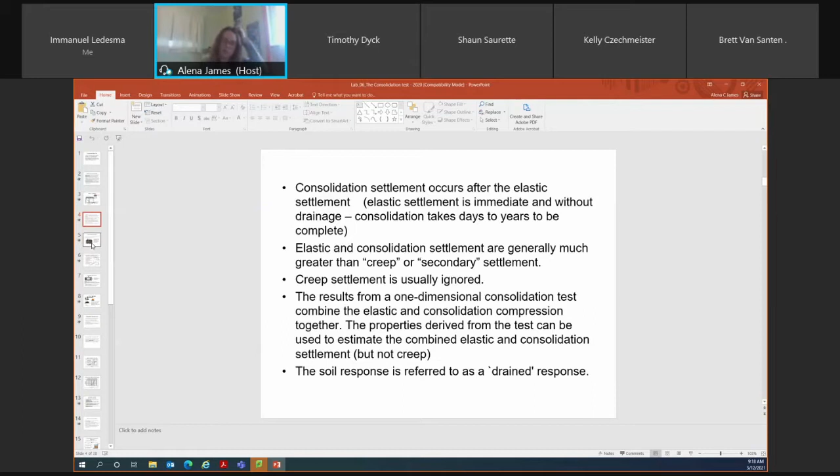Yeah, Ken's retiring. They are looking for someone to teach terrain analysis. They wanted to know if I wanted to teach that. So I made a condensed slideshow and I can upload it onto Learn for you guys if you like.

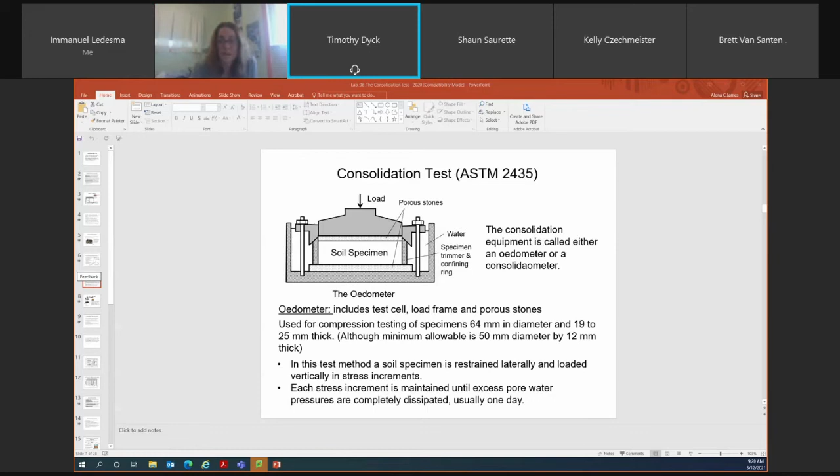He's probably presenting at Niagara Falls, Pavel, because he writes or co-authors quite a few papers, and he'd also be presenting on the Foundation Engineering Manual as well. He's a super nice guy, I really like him.

So I don't know who's going to be teaching terrain analysis.

Okay, so now we're going to talk about consolidation testing. The first six slides are basically words describing what I visually showed you, so you guys can take a look through those slides on your own, and if you have any questions, don't hesitate to approach me.

So now we're going to talk about consolidation testing. Obviously, we can't determine the magnitude or rate at which consolidation would occur without conducting a consolidation test. So this schematic shows you the apparatus that we use to conduct the consolidation test.

You put an undisturbed or relatively undisturbed sample from a Shelby tube into a piece of apparatus called an oedometer. Some people call it a consolidometer, I refer to it as an oedometer. Your soil specimen in that oedometer has a porous stone above and below it, so water can drain both upwards and downwards.

So when your specimen's in the consolidometer, it's restrained laterally and loaded on top vertically in different stress increments. So you apply a 1 kg load, the next day you'd apply 2 kg, so it's cumulative - 1 kg, 2 kg, 4 kg would be your total loads applied.

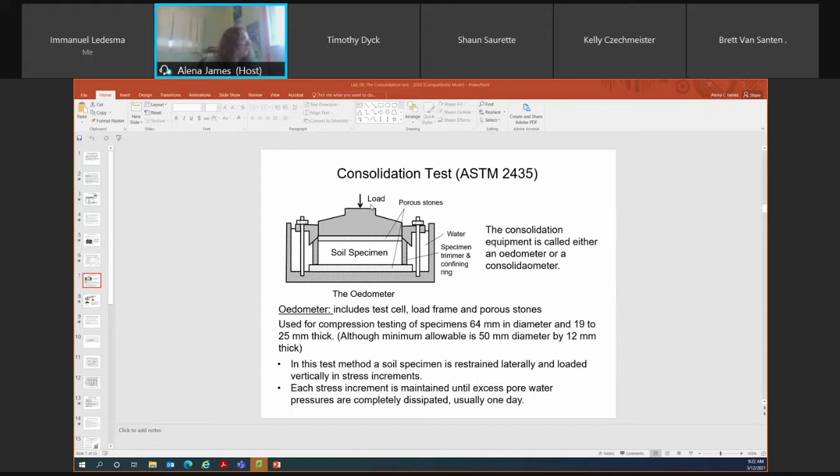So on day 1, you would load with a 1 kilogram total vertical load. The next day, 24 hours later, you would add another 1 kilogram to have a total of 2 kilograms of vertical load. The next day, you would add another 2 kilograms to go up to 4 kilograms. So that's sort of how consolidation testing occurs.

As I mentioned, you can have drainage of water in both the upwards and downwards direction. And you record your change in the height of your specimen in the oedometer about every 5 minutes or so. You record data more frequently when you initially apply the load.

So when you go in and initially apply the load, I believe you record at 15 seconds, 30 seconds, 1 minute, 2 minutes, 4 minutes. And then after that, a reading is taken automatically every 5 minutes.

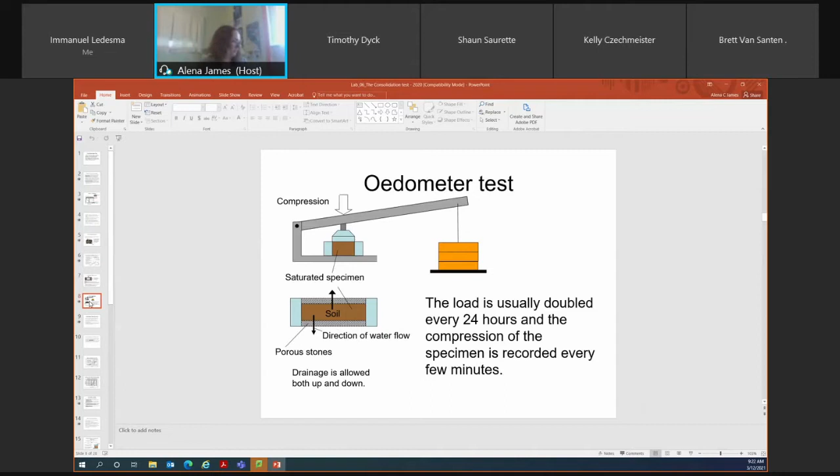So as I mentioned, what you're measuring with a consolidation test is the change in the height of the specimen. By knowing that change in height, you can determine your change in void ratio associated with each of those vertical loads you're applying. And then you would prepare a plot of your change in void ratio versus your log vertical stress.

You can also use this data to calculate both the magnitude and rate, as we've talked about. And we also talked about having to use a relatively undisturbed sample. So you would either take a sample from a Shelby tube, or prepare a remolded specimen, put it in a piece of equipment similar in shape to a Shelby tube, then extract it and do consolidation testing on that.

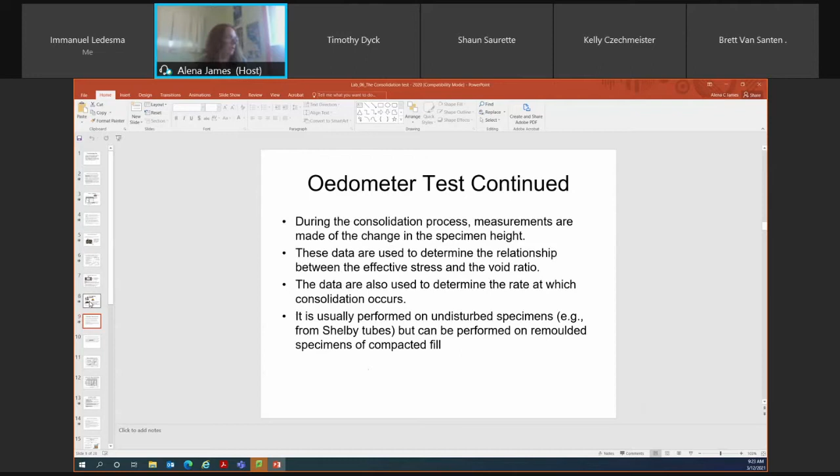A consolidation test is slightly different than both your direct shear and unconfined compressive strength tests. That's because the consolidation test isn't a strain control test - we're not using the load frame, and we're not applying a load at, say, 1% of your specimen length or 1 millimeter a minute. A consolidation test applies a load using hanging masses, and we're measuring the compression. That's why a consolidation test is referred to as a stress control test, because we're applying a vertical load, and a different vertical load every day.

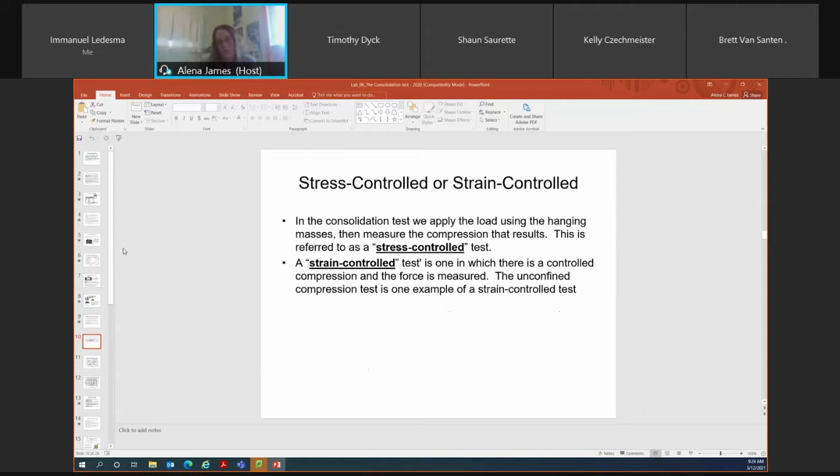Answer questions. Is this like a test? No, sorry, I meant ask questions. There's no test. Well, you do have a test or quiz on consolidation testing, but you won't do it until after the lecture today. It's not due today, it's not due for another 6 days, but I assume no one would be doing it until after today.

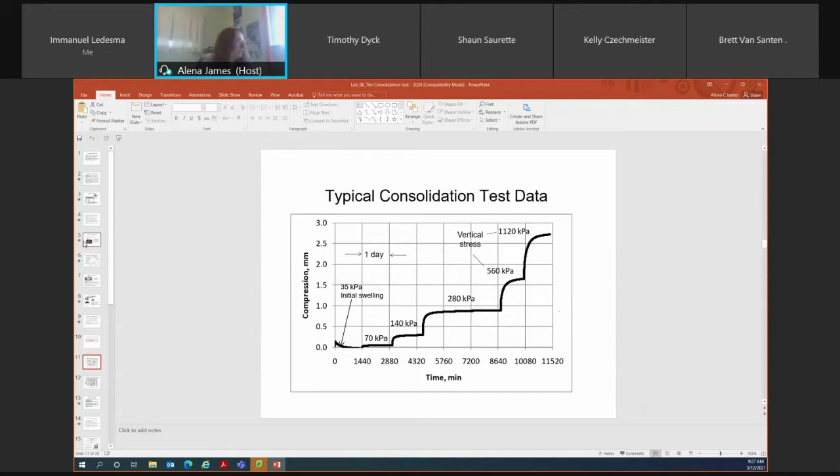Anyone else have any questions about consolidation testing, the general theory behind it, or the process? No, okay. So now we're going to get into some terminology for consolidation testing.

Consolidation tests, obviously we use to calculate the magnitude and rate of settlement, but we can also determine other parameters used in determining the magnitude or rate. The first one is called the compression index. You might see something with a C and subscript C, and this is your compression index. It's used to calculate the amount of soil compression that's going to occur, usually for calculating the amount of settlement on a normally consolidated soil. We'll talk about that definition in a few minutes.

CR is your recompression index, and like CC, it's used to calculate the amount of soil compression, but this is for a soil that's been previously loaded. I'll have a few schematics that will show you the difference between where you calculate your CC value and where you calculate your CR value. This terminology we'll use quite frequently moving forward.

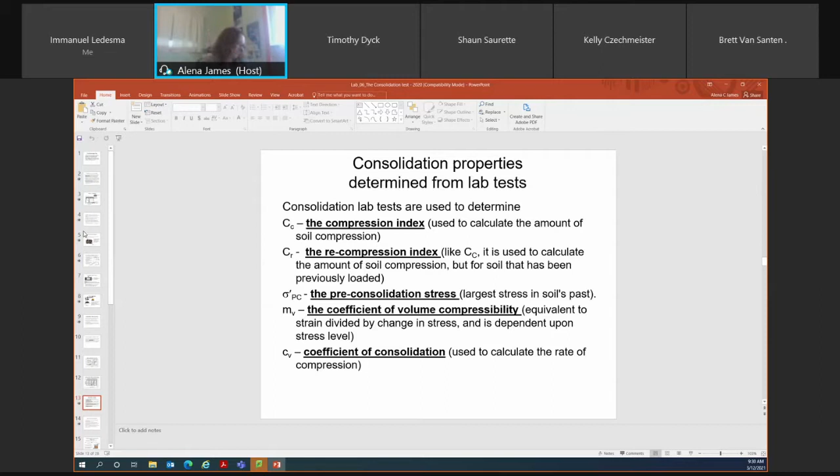I'm not going to go through all the assumptions used in consolidation analysis. You guys can read these on your own. I would say the two most important are that the soil is always considered to be saturated, and that you can have flow in the upward and downward direction.

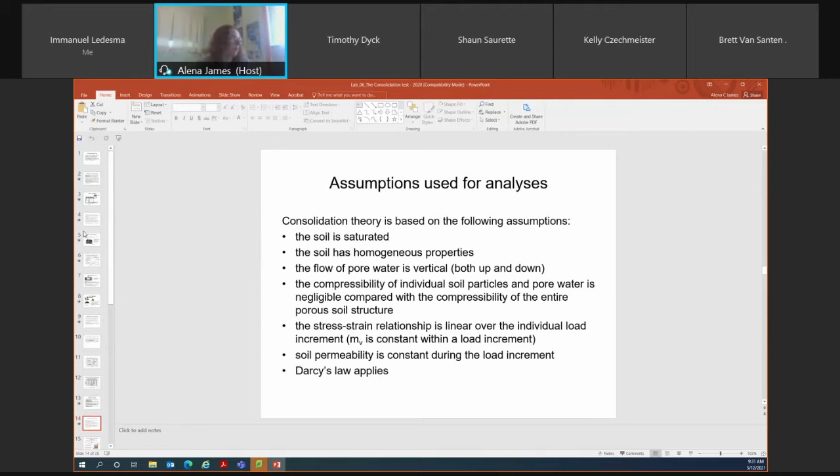So you'll notice as you plot from 1 kg working up to 32 kg, the amount of compression at 1 kg is obviously smaller than the amount of compression you'd see at 32 kg. So as you increase your vertical load, you'd expect to see a greater change in the height of the specimen, and this also means more water is being expelled from the pore space or void space.

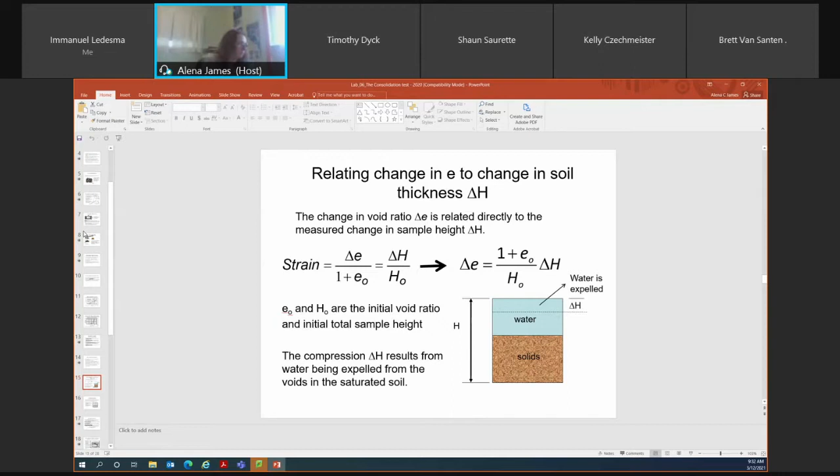Alena: that stuff we had to do last week after the test, is any of that on the quiz? On the consolidation quiz? No. So that external loads stuff? No. Okay, so are we being tested on any of that? You will be, on your next test on March 26th.

So the quiz you have, which you don't have to complete until next Thursday, is solely related to consolidation testing. It would only be related to the material I provided on Learn with the lab data sheet, making sure you understand how the analysis of the data was done, and the spreadsheet showing plots of change in void ratio versus log vertical stress. That's what I'm quizzing you on, the actual consolidation test.

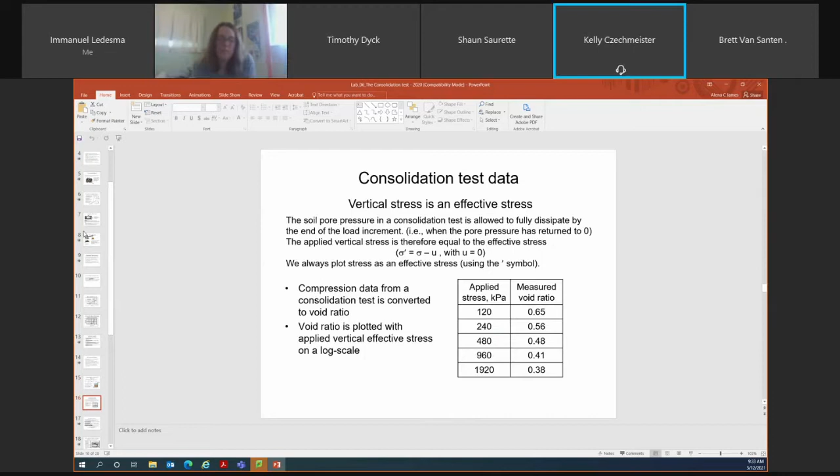Okay, yeah, not the material you worked on after the test last week. Okay, thanks. Yeah, it's similar to the other lab quizzes we've written. I believe it's out of 6, so it's a little smaller of a quiz than the other ones.

And for test 2, that's the 26th of March at 9 a.m.? Correct. And it's a much shorter test, only 2 hours in duration, and it will only be on the material from modules 9 through 11, so nothing's cumulative. I'll send an email about that as we get closer to the time.

Okay, vertical stress. So the log vertical stress is always an effective stress. Just think of it in the sense that all of your excess pore water pressure has dissipated in the scenario when doing consolidation testing, because we leave the vertical load on for a sufficient time period for this to occur. So remember your vertical stress is always an effective stress, because we do consider pore water pressure, but we've given sufficient time for that excess pore water pressure to dissipate.

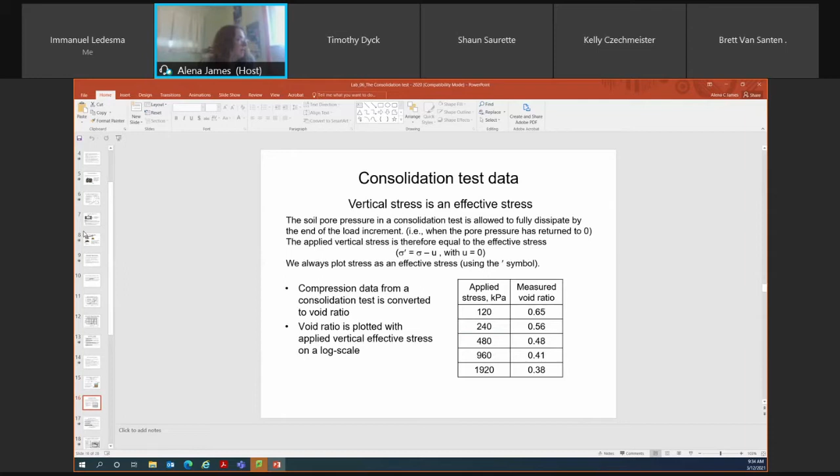So some critical definitions when considering consolidation testing, and also when doing our settlement calculations, are listed here. Pre-consolidation pressure, we already went over that, but that's the highest stress that a soil has ever experienced.

If we think about the Red River Valley, the clay material there is considered over-consolidated. What I mean is that clay material was, in the past, exposed to additional weight from a glacier, so it has had a higher load on it in the past than it does presently. Your pre-consolidation pressure is what the load was that was applied to that clay material in the past, the highest stress value that soil has ever experienced.

That load could be associated with a glacier, or because you preloaded a site for construction, or because heavy equipment was driven over it. How do you find that out? Because you can determine that from your consolidation testing, and I'll show you how to determine your pre-consolidation pressure. It could be from heavy equipment, or any other anthropogenic influences, lowering or raising the groundwater table, that sort of thing.

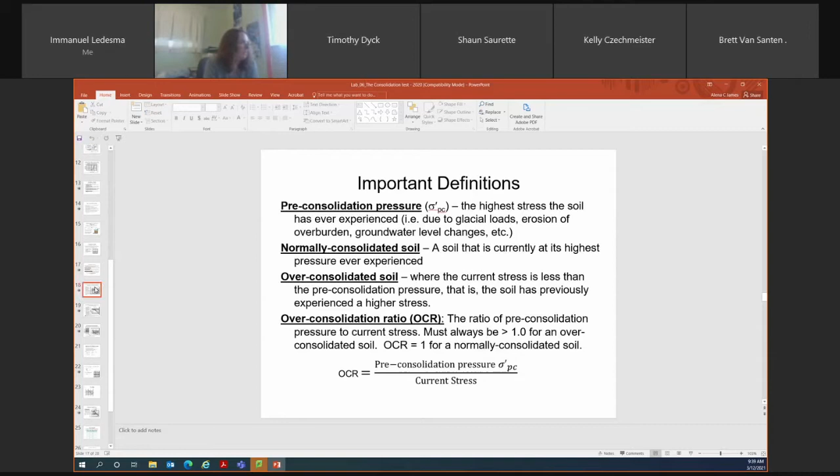Okay, I'll move on to your consolidation curves. Consolidation curves generally have two parts: the initial slope and a later portion. To plot your consolidation curve, you plot your void ratio versus your log effective vertical stress, as shown on the slide. There are two components to the curve. The first component is the line identified in red, where the slope of log stress versus e is very low. So along this red line, the slope is quite small. That's the initial portion of your consolidation curve.

If you look at the next portion of the consolidation curve, it's at a much higher stress, and typically the slope becomes much larger or greater. That's the line which I've highlighted in yellow, the second portion of the curve. So the initial portion is quite shallow, with a low slope, whereas the second portion is quite steep with a much larger slope. The pressure where these two slopes intersect is called your pre-consolidation stress.

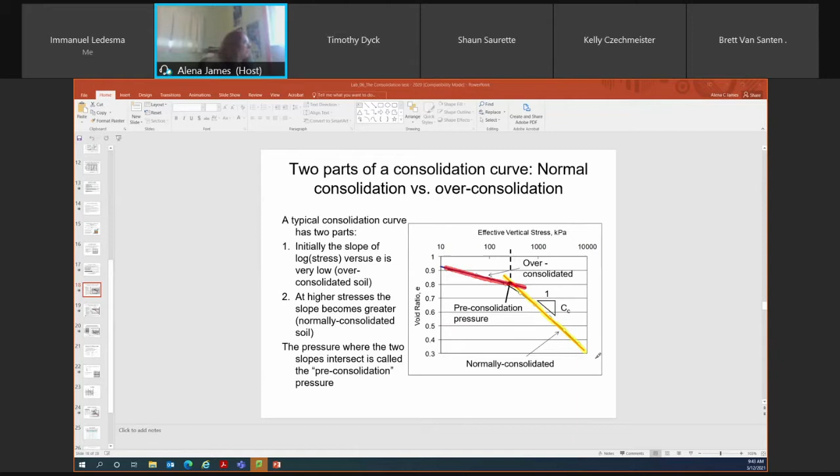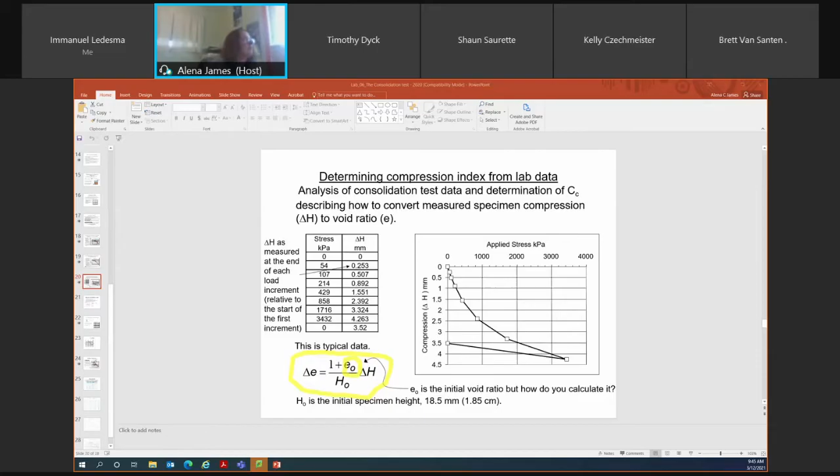Q, you'll find this interesting. Lakehead and U of M are kind of funny. U of M will give you credit for my course, so you don't have to take it there. Geotech courses at Lakehead start with introductory soil mechanics, which you have to take because Lakehead won't give credit for any third-year courses. So if you go to Lakehead, you'll repeat soil mechanics, but from what I understand it's basically just a repeat of the course I'm teaching, so students don't find it overly difficult. The next course would be foundation design. I do a lot more foundation design with the structural engineers, so I have a whole course dedicated to it. The issue with U of M is they don't have a program where you can finish in 2 years. I've heard unofficially that U of M requires fewer courses, but because they don't have a program dedicated to college transfer students, it takes longer to get your degree, though you may only have 3 or 4 classes a term. Whereas at Lakehead, they have a whole program and you go through with other students. I don't know how long it is exactly. I know some students last year from structural were going to U of M because of commitments in the Winnipeg area, and others went to Lakehead. Lakehead is done in 2 years plus a bridging program in the summer, whereas U of M might have been 3, maybe up to 4, but more part-time than Lakehead. I teach foundation design to the structurals, and don't do as much with the municipal students, just because I thought other concepts would interest you guys more, so foundation design might be a little more for them.

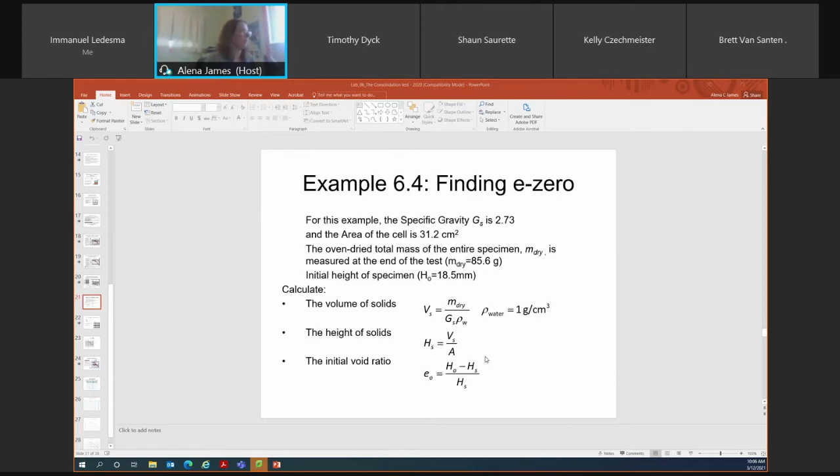And the formulas you would need to go through the process and do the calculations are provided on this slide as well. So I'm going to load up my iPad - take note of these formulas, they will come in handy when you're doing your calculations.

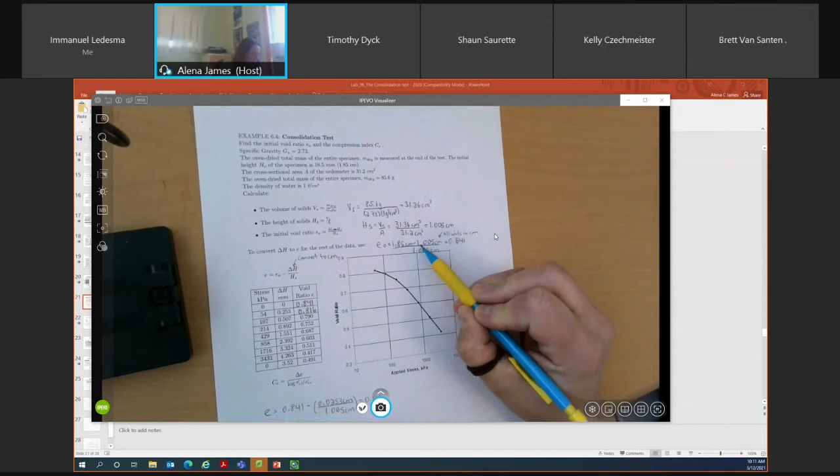Any questions on how I went through those calculations? You simply follow step by step, calculating your volume of solids, then your height of solids, and then you can calculate your initial void ratio.

Is the height after? No. So you mean H naught? Oh, HS—so HS would be the height of the solids. No, that's at the start of consolidation for this one, because that's what you're using to calculate E naught with. So that would be your height of solids at the start of consolidation.

You can calculate E naught, and once you've calculated E naught, you can determine what your void ratio is at any step of the test—at any stress level associated with your consolidation test. In this example, we're going to calculate the void ratio at a stress increment of 54 kPa.

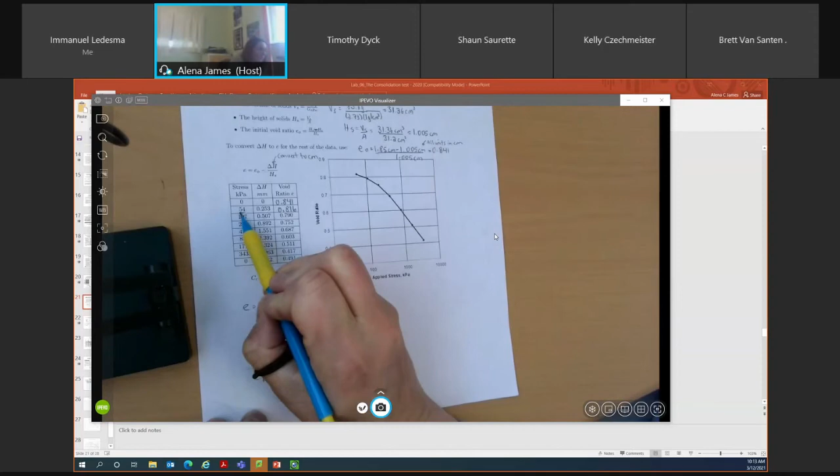This is the formula: E equals E naught minus delta H over HS. For this stress increment, E, which is what I'm trying to calculate, equals E naught, which I determined to be 0.841, minus delta H. These provided values are our delta H values—we have a different delta H value for each stress increment, and you use the one associated with your stress increment. For 54 kPa, my delta H value is 0.253, and my HS value is 1.005 centimeters, which I calculated earlier.

Notice your delta H value is in millimeters. In my problem here, I didn't write down 0.253 because that is in millimeters, so I needed to convert from millimeters to centimeters. The way to convert is to divide by 10, so it's minus 0.0253 centimeters divided by 1.005 centimeters. So my void ratio at the stress increment of 54 kPa is 0.816.

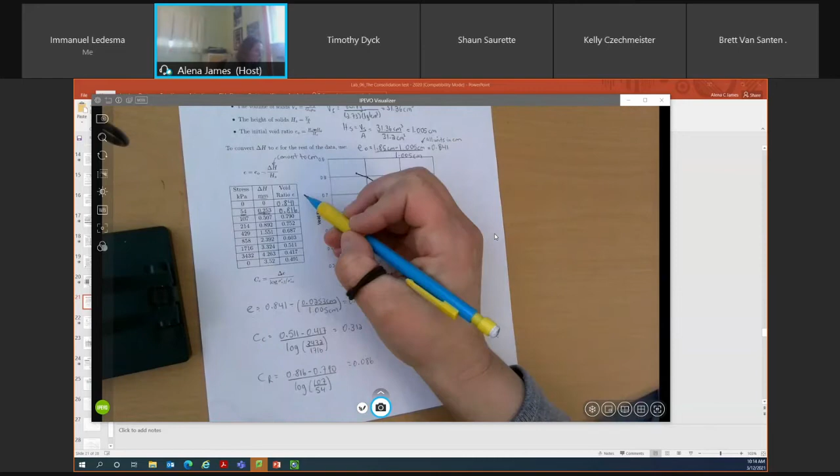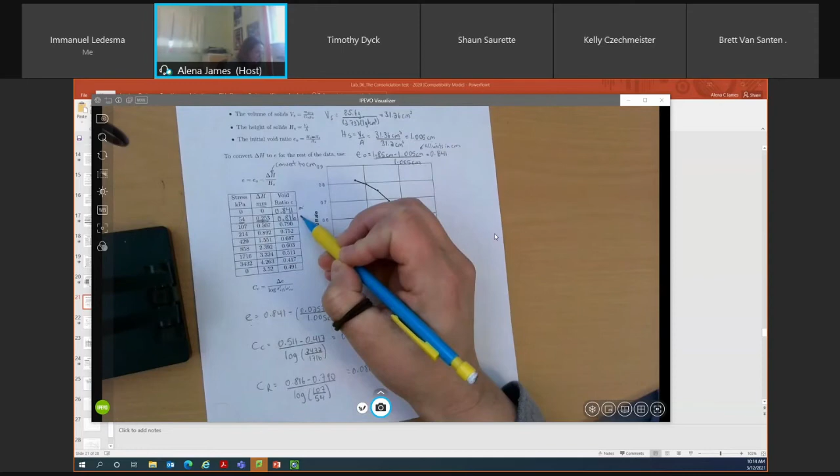Void ratio is dimensionless. You'll notice with this table that my initial void ratio is the highest value, and as you're adding load or stress to the top of the oedometer, your void ratio is decreasing as your applied load is increasing. That's because you're expelling more water from your void space. So your void ratio decreases as you increase the load applied to your specimen. If your calculations show void ratio isn't decreasing as you apply additional stress, double check your calculations because something isn't right.

Typically with clay, most of our consolidation tests are done on clay. Clay would have a void ratio somewhere between 0.8, and I've seen it as high as 1.2. If you're calculating a void ratio in the 0.5 range, likely something's not right, so again double check your calculations.

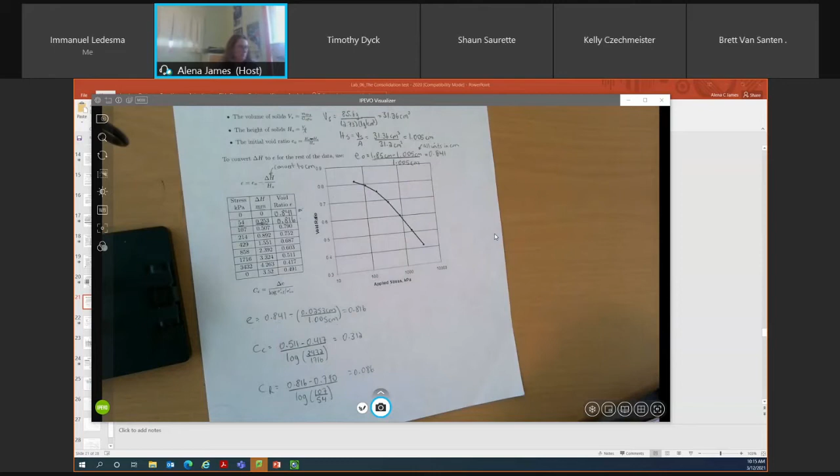Don't worry about the CC and the CR for this example problem because I don't want to do it with this one. But is there any questions on how we determined our initial void ratio or how we calculate what our void ratio is at the various stress increments?

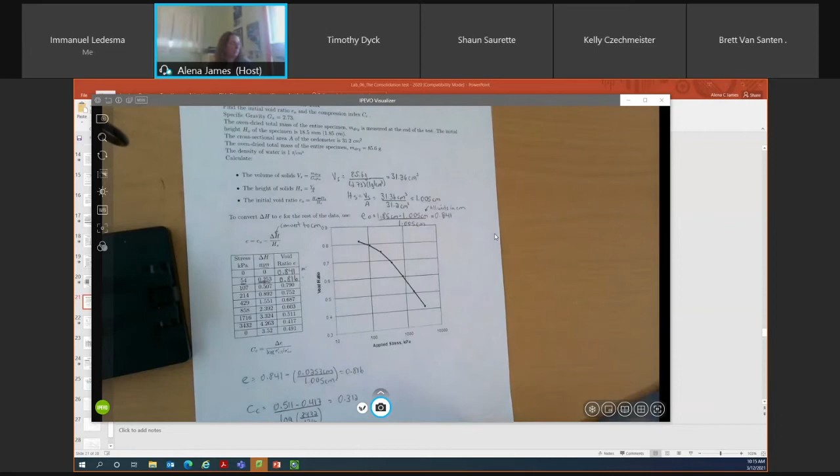Okay, I'm going to. Okay.

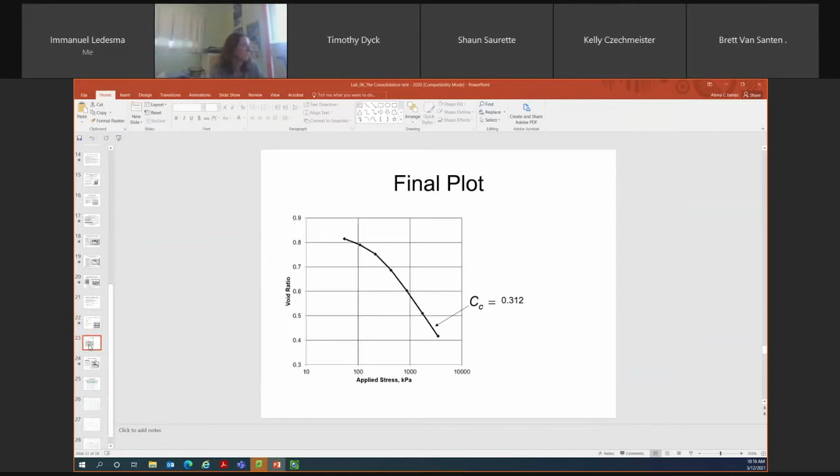With this slide right here, what I wanted to show you is how you calculate your recompression index or your compression index. This is a consolidation curve, a plot of void ratio versus log effective vertical stress. There are two components of your consolidation curve: the initial or upper portion where the slope of the line is fairly shallow, and the lower portion where the slope is quite steep. So there are two different parameters you can calculate: your compression index and your recompression index.

Your compression index is calculated along the slope of this lower line. If I took this data point here and this data point here and calculated the slope using those two data points, that would be a completely acceptable way to calculate my compression index along the lower portion of the curve. If you wanted to use this data point and this other data point, that's also perfectly fine because they lie along that linear portion. That's how you calculate your compression index, your CC value. You only calculate it along the lower portion of your consolidation curve, in the normally consolidated range.

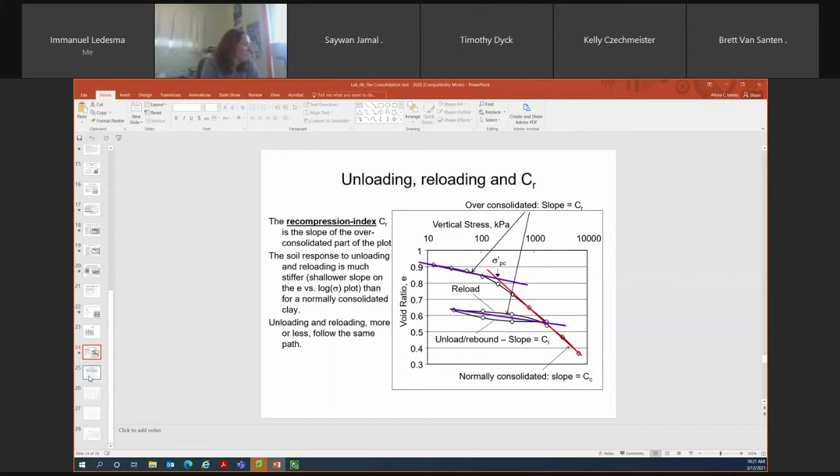Let's do an example problem. Example problem 6.5 - this is the same example problem provided on the PowerPoint slides, just worked through. So this is, you have a dry mass of your specimen.

This is representative of a question I would ask on the test held on the 26th, so this doesn't apply to your upcoming quiz. You would have a dry mass of a specimen, 106.0 grams. Your specific gravity is 2.74. I've changed the height of your initial specimen to be 22.55 millimeters, and your cell diameter is 63.5.

There's a couple steps to this question. The first step is to calculate your initial void ratio. Once you know your initial void ratio, you could calculate your void ratio for each of those different stress increments. That said, guys, on a test I'm not going to ask you to calculate your void ratio for all the different stress increments associated with a consolidation test - I would just give you one line and say calculate it.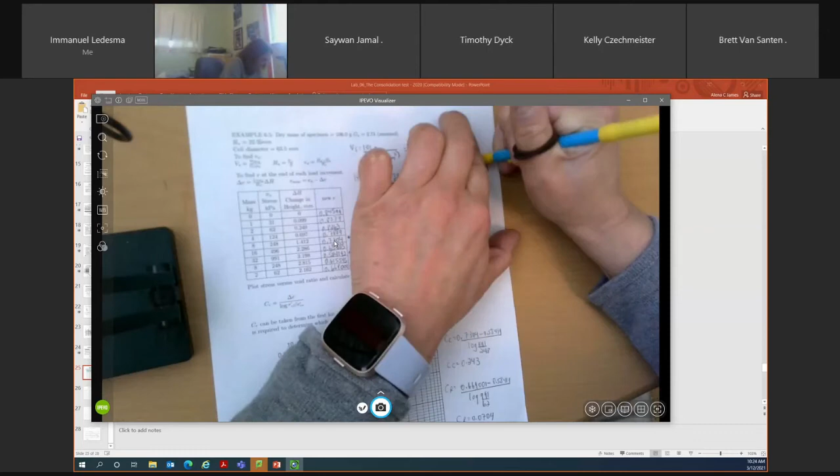The area, I calculated as pi times 0.0635 meters squared divided by 4 - oh, we did it in centimeters, so 6.35 centimeters squared. If you go through and do this calculation, you get an area of 31.66922 centimeters. So I calculated the height of solids to be about 1.221569. I carried a bunch of sig figs with that.

The next step is to calculate your void ratio. Your initial void ratio is equal to your initial specimen height minus your height of solids. Your initial specimen height is 22.55 millimeters, and the height of solids I converted from centimeters to millimeters: 12.21569 millimeters - I just multiplied the centimeter value by 10. So I go through and calculate my initial void ratio to be 0.84599.

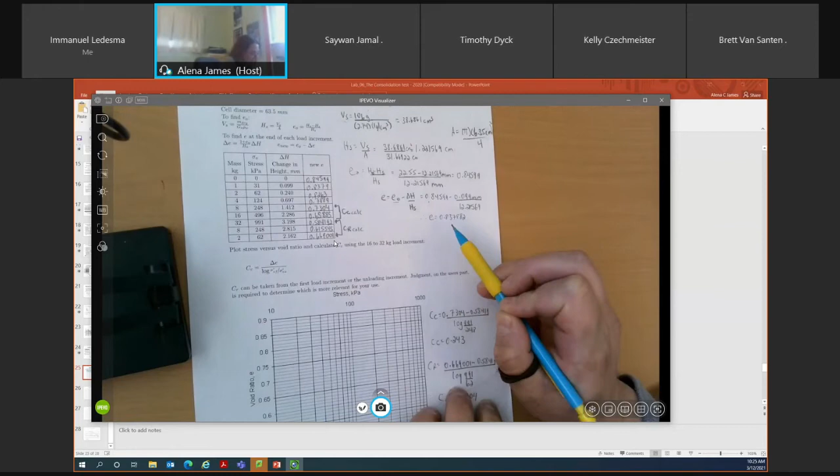So that's my initial void ratio. If I take a look at what would be my void ratio at 1 kilogram mass, or at 31 kPa stress increment, I know my initial void ratio is 0.84599 because I calculated it above. I know delta H, so I know my delta H value is 0.099 millimeters. And I also know what the height of solids is because I calculated that up here as well.

Again, the key is to ensure your units are consistent when you're doing your calculations. You can't mix centimeters and millimeters because your answer is not going to be correct. Here you'll see I've converted everything to millimeters this time instead of centimeters. It doesn't matter which way you prefer to go.

Just make sure your units are consistent when doing the calculation. So I've gone through and calculated my void ratio at the 31 kPa stress increment to be 0.837882, so I would record it as 0.8379. That's how I've recorded it here.

So you can go through and follow the same process and do the calculations for each of the different stress increments. What I did, guys, was make a spreadsheet, and from that spreadsheet I was able to derive the values much quicker. So those of you comfortable using Excel can use Excel and make a spreadsheet and do the calculations accordingly. It's important that you're able to plot your data to do the analysis.

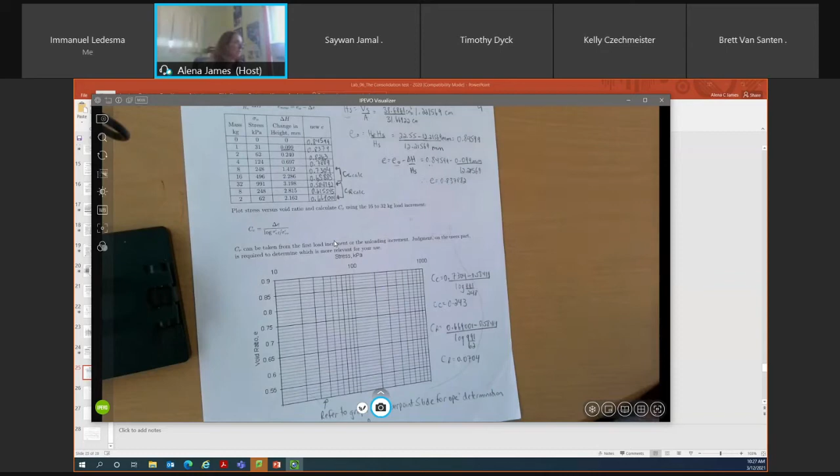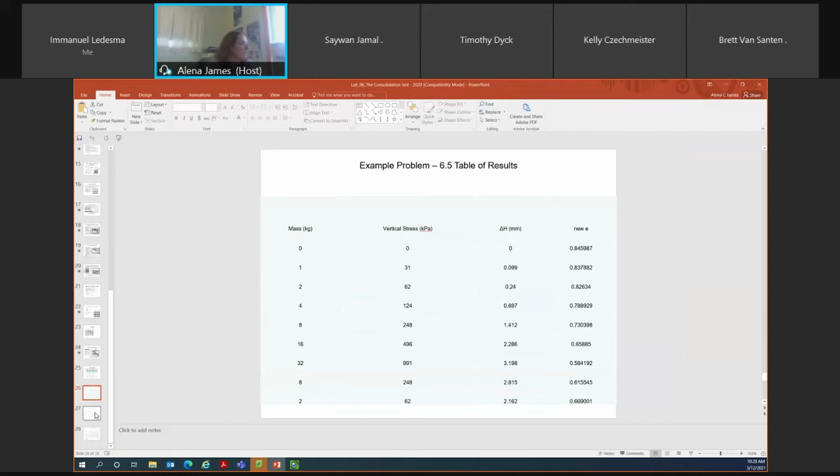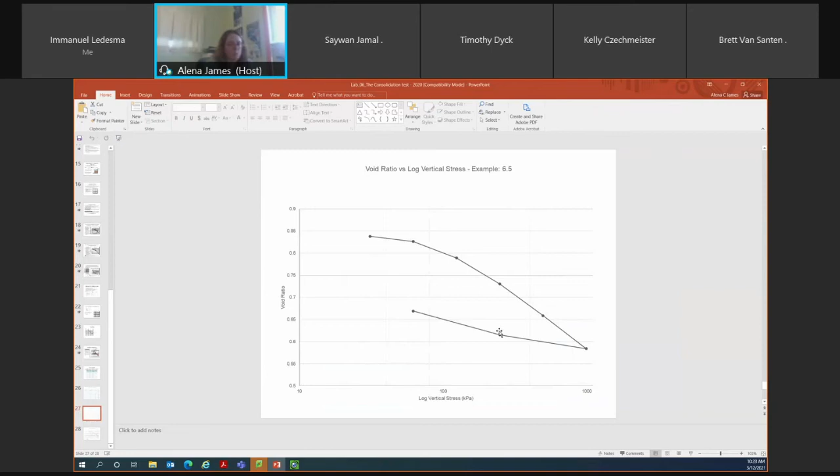So I just went through in Excel and made major and minor grid lines so it was easier to derive values. I just changed the scale of my plot somewhat. From this graph here, I was able to determine three things. What do you think the three things are that I was able to determine from this graph?

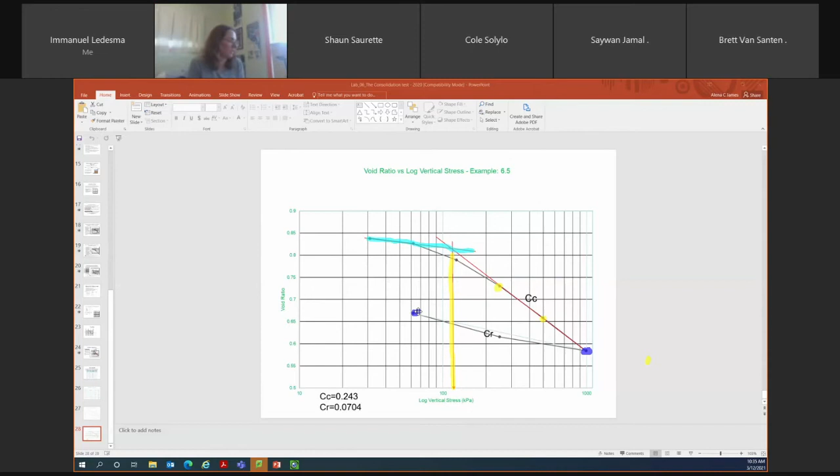Okay, so let's go back. So I don't have my graph on this, I haven't plotted my data points on this graph because I plotted them in Excel and tried to show them to you guys on the PowerPoint presentation. But when you are calculating your compression index and recompression index on that semi-log graph, yes, it's a slightly different process.

So you'll see here for my compression index calculations, I took the data point at 991 kPa, and I also took the data point at 248 kPa. So I need to know what my void ratio is at those two data points and what my stress increment is. When calculating my compression index, my CC value, it is 0.7304, which is my larger void ratio number at 248 kPa, minus 0.58419, which is my void ratio at the higher stress increment at 991 kPa.

That's just the same math you would normally use when calculating the slope of a line. Where it's different is when you divide, it's divided by the log of your highest stress increment divided by your lowest stress increment. So I chose two stress increments, 991 kPa and 248 kPa, so it's simply the log of 991 divided by 248. That's generally around the log of 4, here it's 3.995, so it will be just the log of 4. That's how you calculate the slope of your line using the log scale.

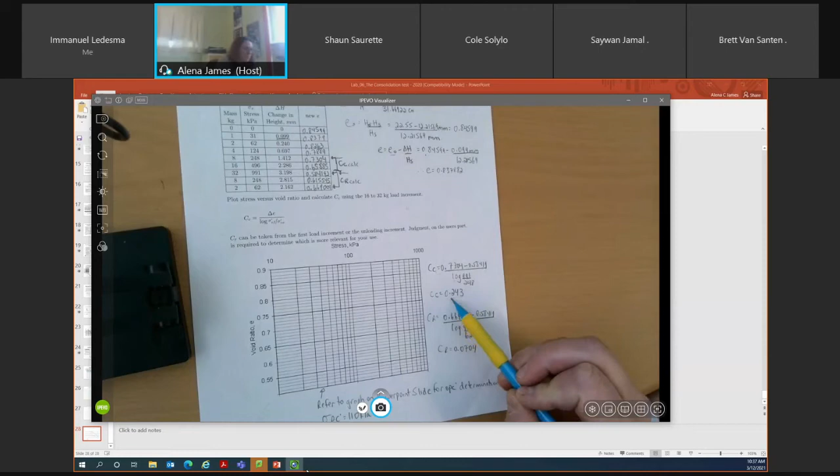So if you go through and do the calculations, the slope of your line here is about 0.243. One thing to note: your CC value should always be larger than your CR value, because your CR value is a fairly shallow slope, whereas your CC, representing the normally consolidated portion of your curve, is always much steeper. So your CC value should always be larger than your CR value.

Yeah, so that's why it's called semi-log, and maybe I phrased that incorrectly. The e value is plotted normally, and the vertical stress is on a log scale. But I would give you guys graph paper for a scenario such as that, so you're not expected to go and purchase that type of graph paper.

When you're doing your CC calculation, CC values generally range between about 0.2 and 0.4, especially for clay in the Red River Valley. For my recompression index, or CR value, I used the 991 kPa stress increment and the 62 kPa stress increment. I had a void ratio of 0.669 at 62 kPa, since that's my larger void ratio, and a void ratio of 0.584 at 991 kPa. I divided by the log of 991, my larger stress increment, divided by 62 kPa, my smaller stress increment. My CR value in this situation comes out to about 0.0704. CR generally ranges from about 0.03 to just over 0.1, so that's the range you should expect to see for your CR value.

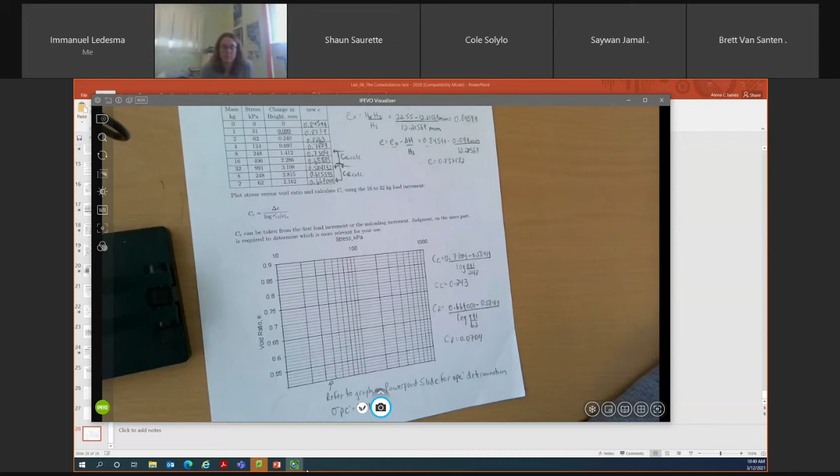Okay, any questions? No. Okay.

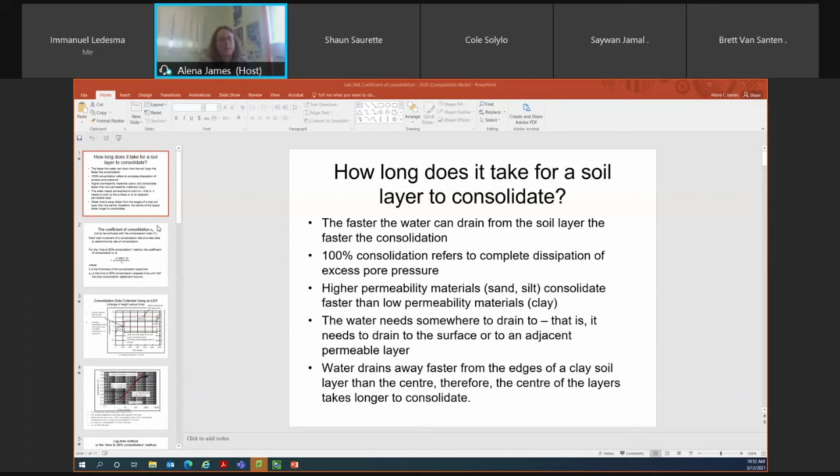As I mentioned, to calculate the rate at which settlement occurs, we need to calculate our coefficient of consolidation, or CV value. Each load increment in consolidation test data provides data we can use to determine the rate of consolidation. So if we had load increments of 2 kg, 4 kg, 8 kg, my coefficient of consolidation is different for each of those loading increments. Your CV value isn't constant, or the same, for a single specimen; it varies depending on which load increment you're looking at. We generally only calculate our CV values along the normally consolidated portion of the curve, reserving those calculations for the 16 and 32 kg loading increments. Those are generally the two loading increments we'll calculate our CV value for.

There are two different methodologies that you can use to calculate your CV value: the log time method and the root time method. The methodology and the way you plot the data is a little bit different depending on which one you're using. Both require the initial thickness of your specimen prior to testing starting, and a t-value, either your T50 value, the time to reach 50% consolidation, or your T90 value, the time to reach 90% consolidation. It just depends on which methodology you're using.

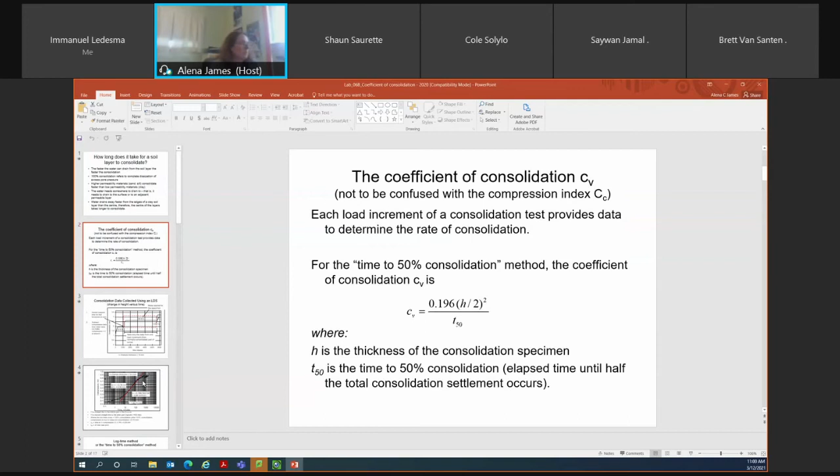So this is the methodology we use for the log time method. Any questions on that?

So Conrad, the CV value doesn't represent how packed the material is. It's trying to calculate how long it would take for your settlement to occur, how quickly your settlement is occurring. For example, with the Red River Valley, it would calculate how quickly that clay consolidates compared to clay material in Brandon. So that's what CV is telling you, how long it takes, or how quickly that clay material is consolidating.

Does that make sense, Conrad? Okay. If it doesn't, just let me know, I'm willing to re-explain.

So again, here's another example of how you would calculate your T50 value. Here is a consolidation curve, S-curved in shape. The user would draw a linear line along the middle portion of the S-curve.

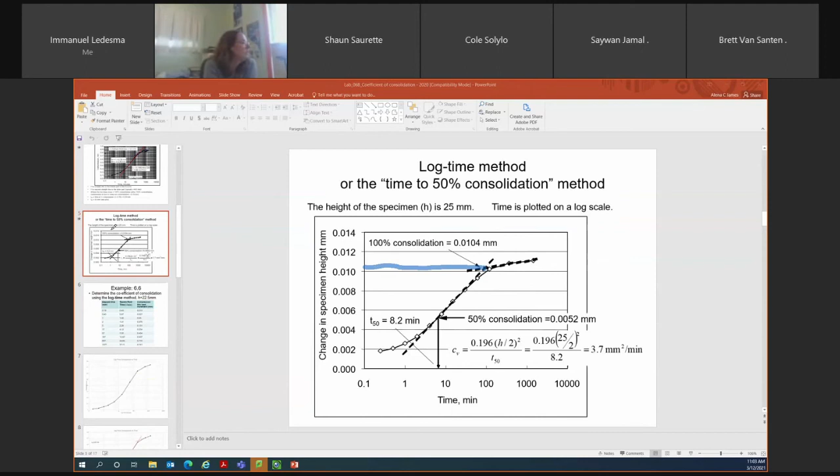I'm just going to do the examples off of the PowerPoint slides because there's a lot of plotting of data, so I made slides with the example problem. This is example problem 6.6, asking you to determine the coefficient of consolidation using the log time method. The initial height of the specimen was given as 22.5 millimeters. This is very representative of a problem I would give on a test, like the big test at the end of March, where I'd give you the elapsed time, square root time, and compression, then tell you to use either the log time or root time method to determine your coefficient of consolidation. It would be up to the student to determine the appropriate methodology and go through the appropriate process.

So with this example here, you have your elapsed time and your compression. If I'm asking you to do the log time method, it would be a semi-log plot, where time is on a log scale and compression is not on a log scale. So here I plotted the data.

So it's log time, compression versus time. I simply plotted the data that's in this column, and the data that's in this column here. So the compression is on the y-axis, the time is on the x-axis, but it's on a log plot.

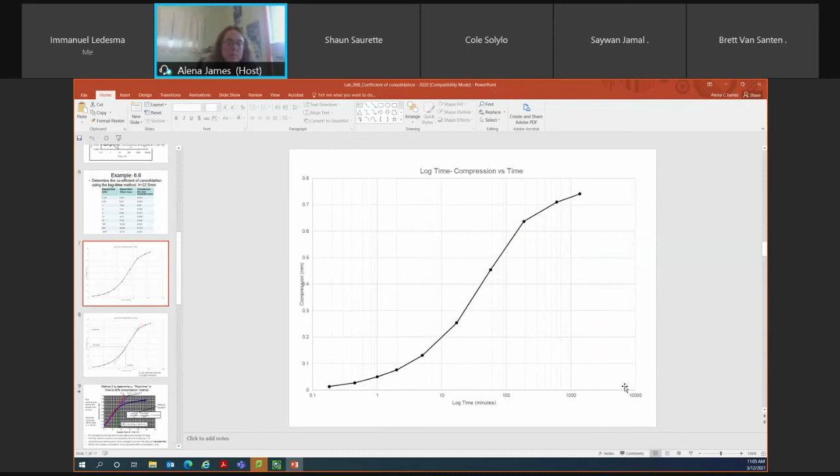Those who prefer to graph in Excel and not use the graph paper that I provide for a test, that's fine as well. It's not a best fit line - you just connect the dots.

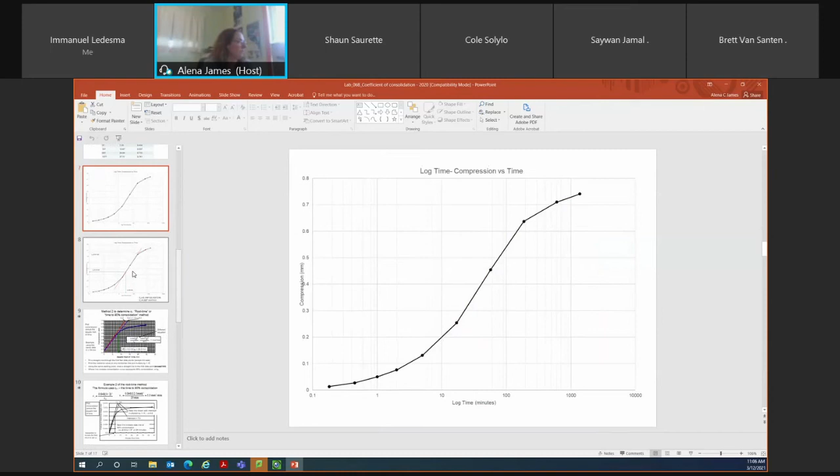Okay, so here's exactly the same data plotted, but I've gone through and done the analysis portion. You'll see that with the analysis, I've drawn two linear lines, and they're both represented in red. So I've drawn one linear line here that's supposed to represent the linear portion.

I don't know, we're just going to delete that. Where's delete on this computer? Okay, well, I'll do my best.

This represents the linear portion of the middle portion of the S curve. And this line right here on the top is at a time interval greater than 400. This red line here that I'm going over in purple represents the linear portion of the upper portion of my S curve at a time interval greater than 400 minutes.

So where those two lines intersect is your H100 value - sorry, this shouldn't say T100, it should say H100. Where those two lines intersect, I draw a horizontal line over to my y-axis, or compression axis. My H100 value is equal to 0.67 millimeters.

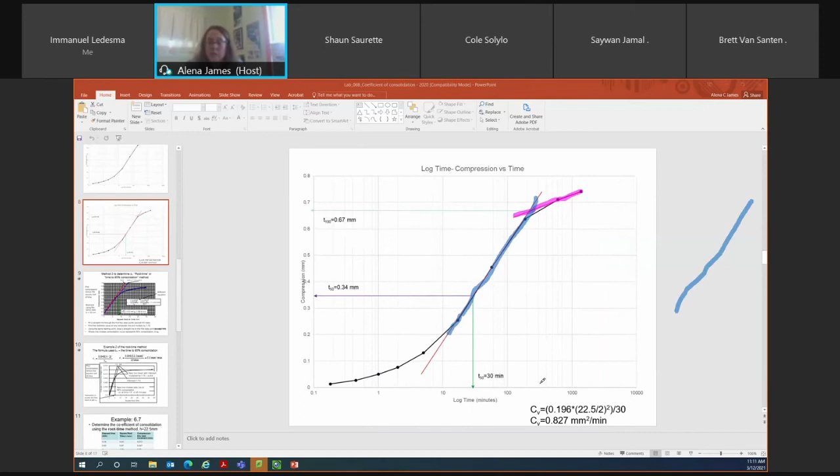So I encourage each of you to go through and work through this problem on your own. This is very representative of what you will see at the end of March. Plot this data, do the analysis for me - you'll have to know how to do both methods. So I do encourage you to go through and have a good understanding of this.

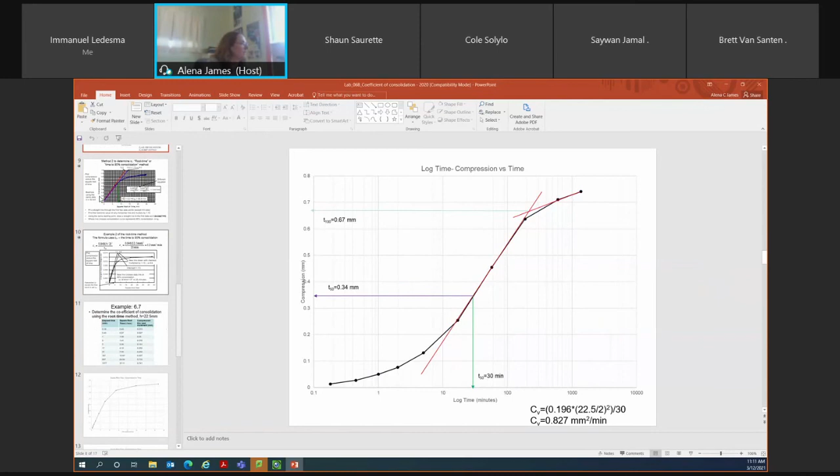Okay, the final method. The final method is the root time method. This is another method you can use to calculate your CV value. The calculation is done a little bit differently because you're using your T90 value instead of your T50 value. The T90 value represents the time it takes to reach 90% consolidation.

In an ideal world, it shouldn't matter which methodology you use - your CV value calculated using the root time method or the log time method should be the same. In the real world, does this happen? No. The values are usually a little bit different, but it would be up to the lab personnel and designers to determine which methodology provides the best results. So as I mentioned, generally clay will use the log time method, and with sand and silts with no cohesion, we'll use the root time method.

Root time method, you're plotting compression versus the square root of time. If we go back to the data from this example problem, the compression data is the same, but you would be plotting your square root of time data instead of your elapsed time. Your square root of time data is simply taking the square root of your elapsed time value.

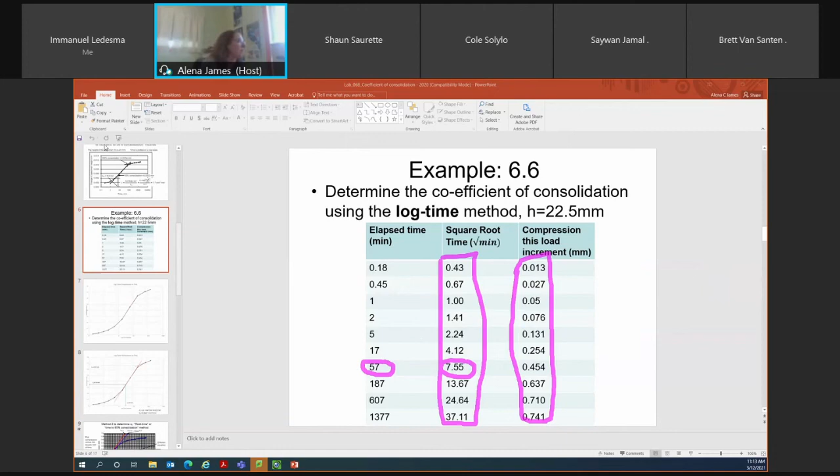So going back to this plot, square root versus time, it's the square root of your time that you're plotting, not your elapsed time. Compression is the same, so you're plotting your compression data in the same way for both the log time and the root time method. For example, if I had an elapsed time of 57 minutes, I would be plotting it as 7.55. You'll see that data point plotting right about here on my curve compared to plotting on my previous graph, where it was plotting at 57 minutes.

With your square root of time method, the way you do your analysis is you fit a straight line through your first set of data points, except for your data point at time 0. Don't fit your line of best fit through time 0, but through any data point larger than 0, fitting a straight line through the first few data points. And you extend that linear line so that it extends higher in elevation than your last few data points.

You'll see here that the test was completed with a compression value of about 0.85. So my plot extends up to a compression of 1.0. I could have ended my plot at 0.9 and that would have been okay as well, but I just draw my linear line of best fit. Here I extended it to a compression value of 1, and I see that it intersects this compression value of 1 at a time of 12.2 minutes.

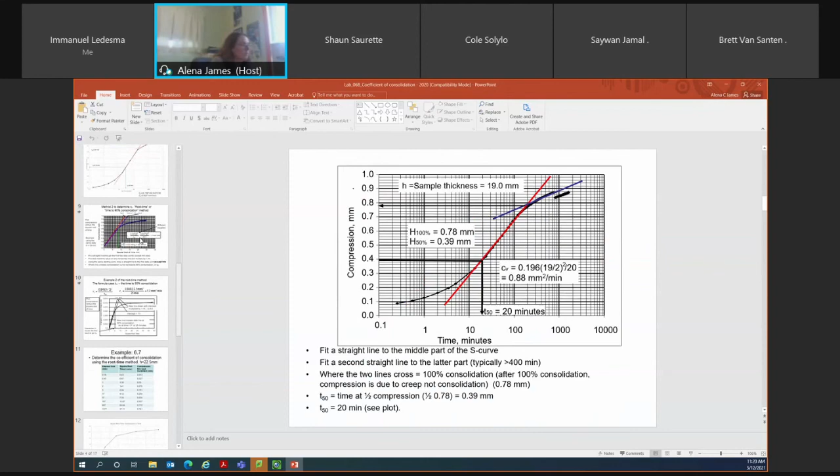What did I calculate it to be here? Here I calculated it to be 0.88. So you'll see there's a little bit of a difference in the CV values. Not huge, but there still is a difference.

Anyone have any questions on the root time methodology? The root time I find a little more confusing.

Someone must have a question. Where does the 1.15 come from that you multiply the line? It's just the methodology for root time, so it's always 1.15, that never varies. So if I gave you another set of data, wherever that initial line intersects your first major grid line after your last data point, you would multiply that time value by 1.15. It's just the process for the root time method.

And I guess there's no way of finding any other T values other than T90 for this? Correct. So log time is always T50 and root time is always T90, and there's no way to find any other values. Someone way smarter than me has gone through and derived these formulas and done the corrections. I'm assuming these 0.848s and these 0.196s are some sort of correction so that they're representative of the T50 and T90 value.

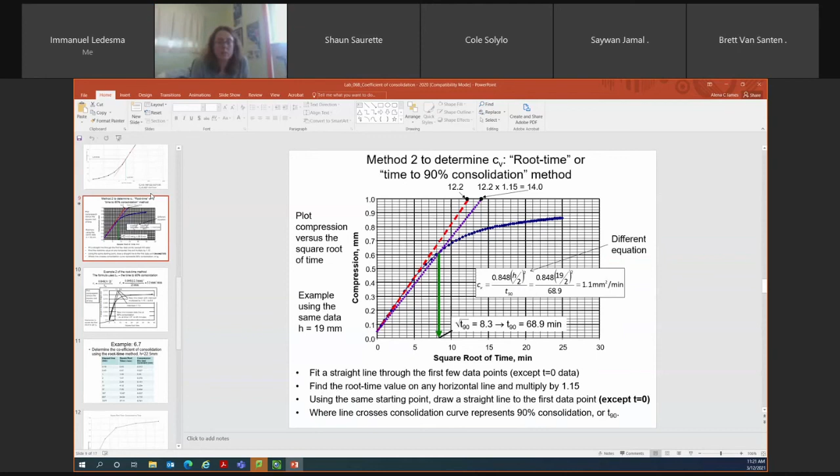This is another example of just using the root time method. Again, it's just showing you how to derive the intersection point from your initial linear line with a specific curve. So here, if we drew our initial linear line, starting it here—I drew it up here and I have it intersecting my first major grid line after my last data point, so I have it intersecting at 0.014 millimeters.

I know the time associated with that is 7.5, so I would multiply that 7.5 by 1.15. So I would know that I would start at a square root of time of 8.6, and then I would draw a linear line here. So this represents 8.6, and it's really hard to draw with your mouse.

And I'm just going to draw this linear line back to this first data point. I'm sorry, I know it's not very linear, but where this line intersects my consolidation curve, which is about right here—we'll do this right here. I need to make these drawing tools way easier. Where that intersects my consolidation curve, that represents my T90 value.

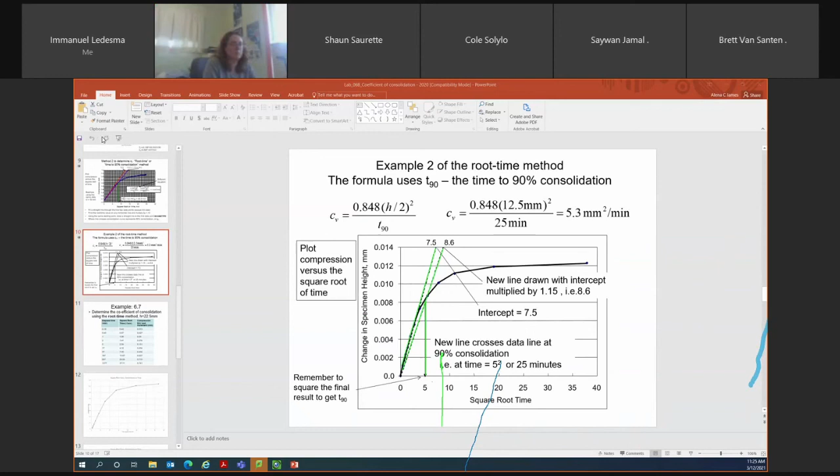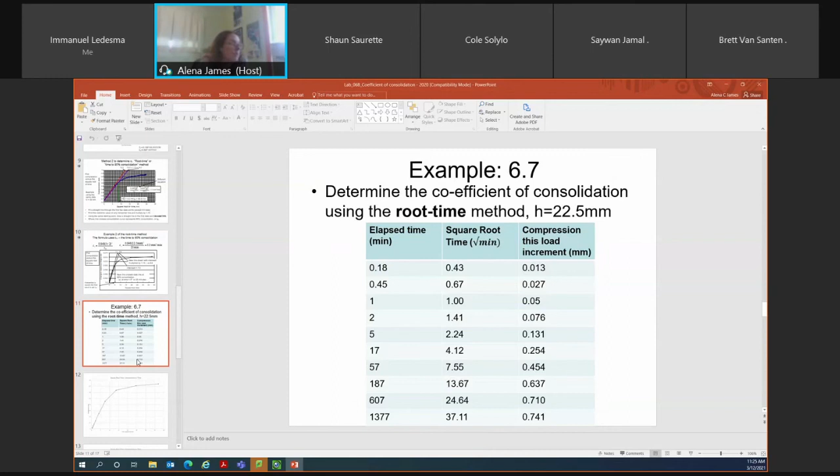Here's the same example. So here you have exactly the same data as you did in, for example, problem 6.6. The height of your specimen is the same. You have your elapsed time, your square root of time, and then your compression for the load increment. So here I just plotted it up. You'll note here I don't have a time of 0 because you can't take the square root of 0—well, it's 0, but anyways, I didn't plot it up.

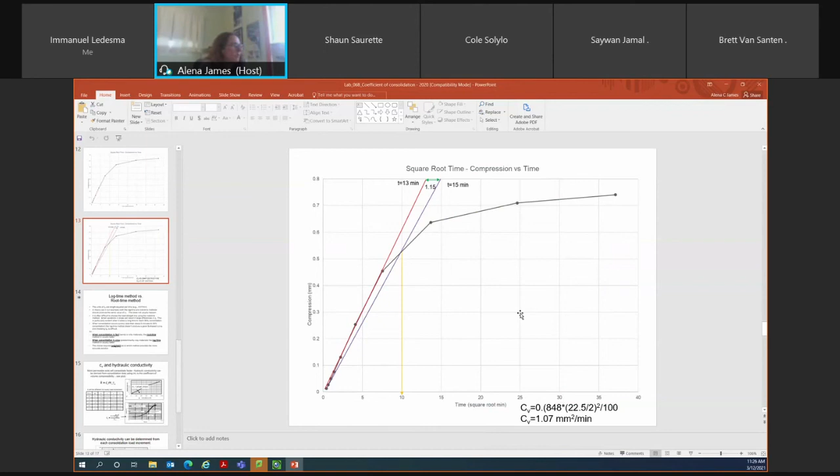Here I went through in Excel, and the red line represents the linear portion along the first few data points of my consolidation curve. I drew it so that it went to a major grid line of 0.9, and that line intersects that major grid line at about 13 minutes.

Then I multiplied that 13 minutes by 1.15, and that's about 15 minutes. So the second linear line would start at this data point and extend back to this data point right here. Where this purple linear line intersects the consolidation curve, I can draw a vertical line down to the square root of time axis to determine my square root of T90. So that's about 10 minutes.

So therefore my T90 value was 100, and I could go through and calculate my CV value. Here I got about 1.07 millimeters squared per minute.

Any questions? I know we've gone through a lot today.

It is on the Learn quizzes. I'm not a huge fan of the Learn quizzes, but that's what we were forced to do this year. Just do your best, I accept a range of values, and I look at everyone's test in person, so if you're in the ballpark, you generally get the marks. Sometimes you have to use a ruler and estimate, but I'm more looking for process, and I can tell process by the values that are provided.

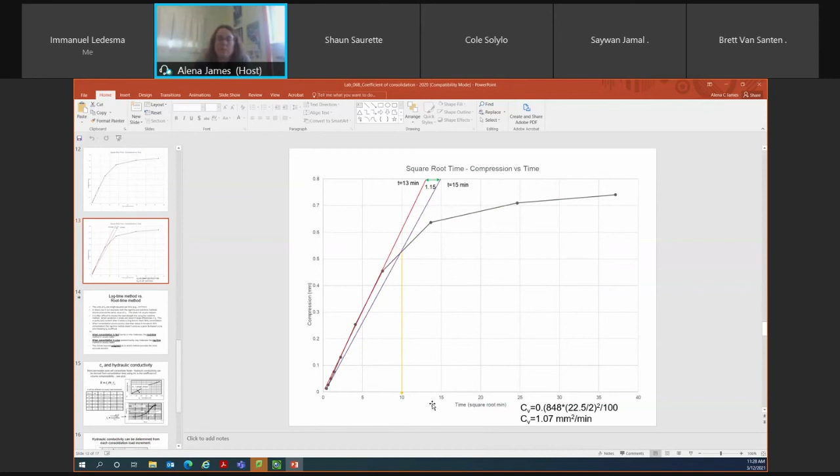Okay, I'm going to leave the last part of the class up to you guys. I'm sure it's information overload. Has anyone gone through that external load information that I posted on Learn, the example problems, and looked at the videos?

The important components of external loads is that you understand the approximate method and the influence coefficients. Both of those methodologies are used quite frequently when doing settlement calculations, which we'll be moving on to next week. So you have to have a good understanding of the approximate method and of the influence coefficients.

I don't know if you guys want me to go through that today. I somewhat feel like it would be information overload, but I'm open to suggestions. Do you guys want me to do a short tutorial with you next week just to make sure you understand external loads?

Okay, what day works for you guys next week? Not Wednesday for me because we have our ARP interviews. What is your class schedule next week? Thursday morning? Just let me check, we're starting to do scheduling for next year. My Thursday morning next week is free.